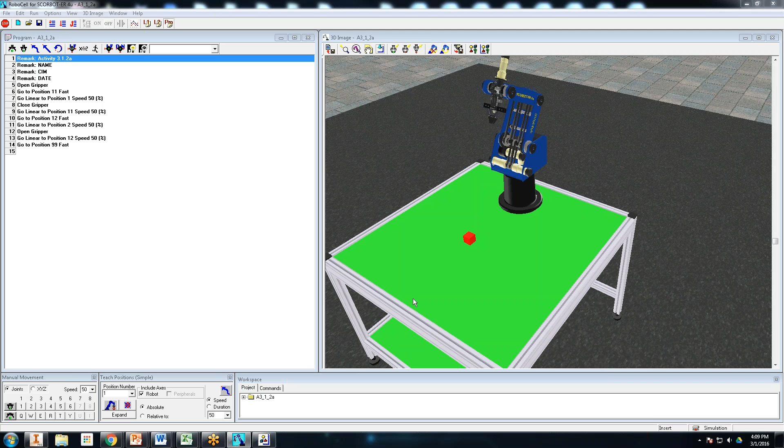Like I said, I was just wondering because you had a problem and it was something you knew about. No, like I said, this is the first time in years that this software has given me any problems. I've had no problems whatsoever with this software.

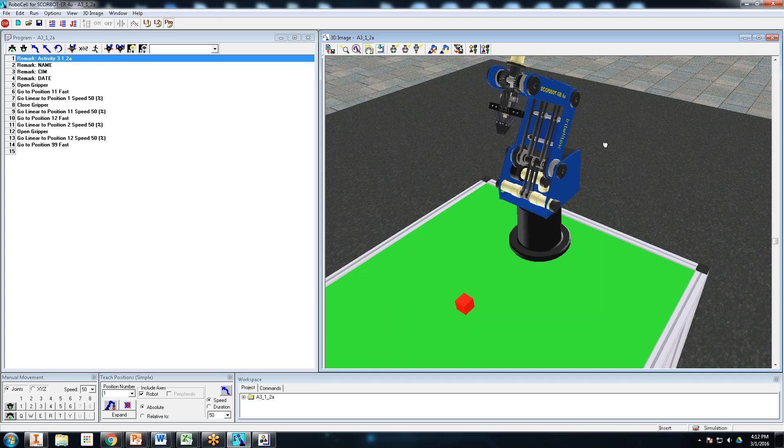Kids have a hard time with this. So when you go to open a program, you don't really open it sometimes - you have to import the 3D model. As Jim's going through this, if you have any questions, the idea is you make the cell, you make the factory you're going to be working in, and then you open it up in Robocell and program it. So with that, go ahead Jim, finish up with the building.

In cell setup, all I have defined is what robot is going to be available for me in my folders. That part can't be undone once the file is created. So once I go to new and say it's an ER4, that part is static - it's going to stay for the specific cell. I can now come into robot, and there's only going to be one there that's my option - whatever one I selected as my default.

When I go ahead and import it, I can either bring it in with a slide base, 1 meter or 1.8 meter, or with no slide base. Your first couple activities, the kids are going to use no slide base. So you just say OK, and when it does that, it'll automatically populate the robot right in the middle of the screen at 0, 0. So it's defined right there in the middle, just kind of floating there.

Each one of these folders holds a whole bunch of different things that you can put in. You can practice with a bunch of them, but for right now all I want is a robot, a table, and some material to play with. So I'll come to General, and I have this nice little table built out of what looks like 80/20, and you get to decide how big it's going to be. For this first couple activities, you can just leave that alone.

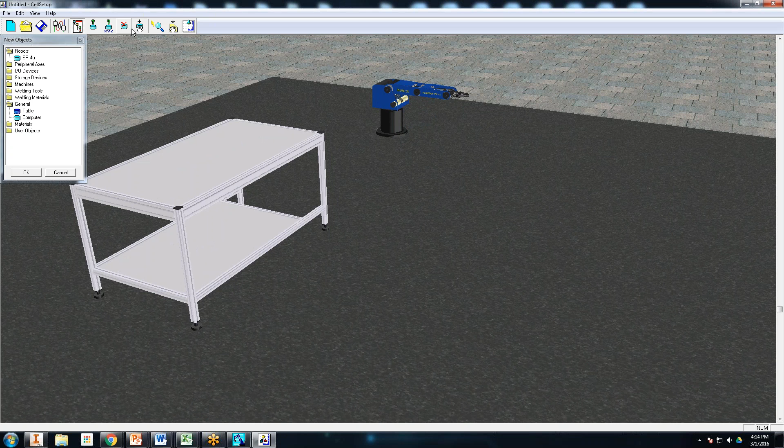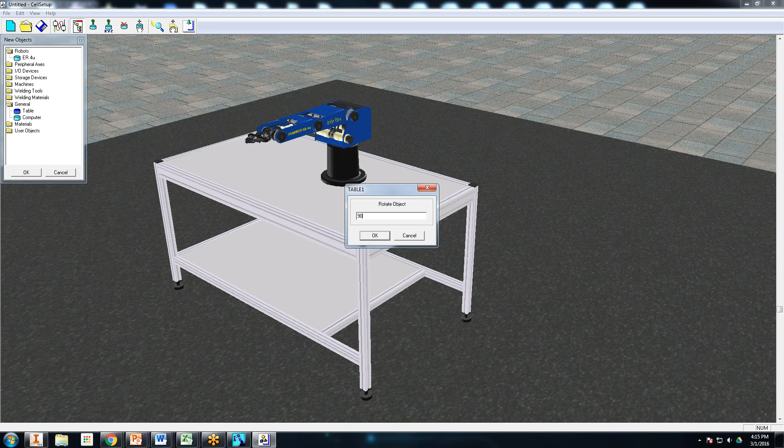Your little icons up here, your little blue cylinders - the first one will just show each thing's name. Your XYZ will show their coordinates. The one with the red X on it will allow me to delete objects. The one with the little hand on it will allow me to grab objects and move them to some location. You can also double-click an object - it'll give me the option to rotate it, and also the option to put it in a specific position, whatever I want.

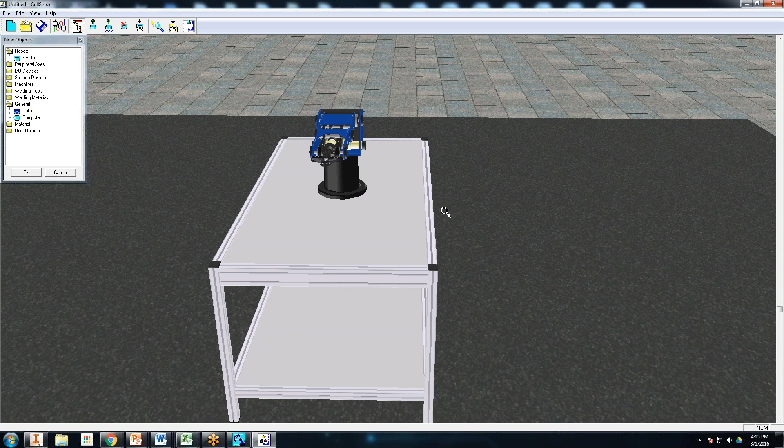One of the things I want the kids to really start to understand, which you have in your PowerPoints, is before getting into this robot and everything, understanding what a robot's work envelope is. So if I double-click the actual robot itself, I've got an option that says show its envelope. Once I do that, it shows me everywhere the robot can reach and can't reach. The bad part is you've got to try and teach the kids it's an illusion - this ring is based off of how the robot currently is. So if you really look at it, he can't actually reach this blue line on the table.

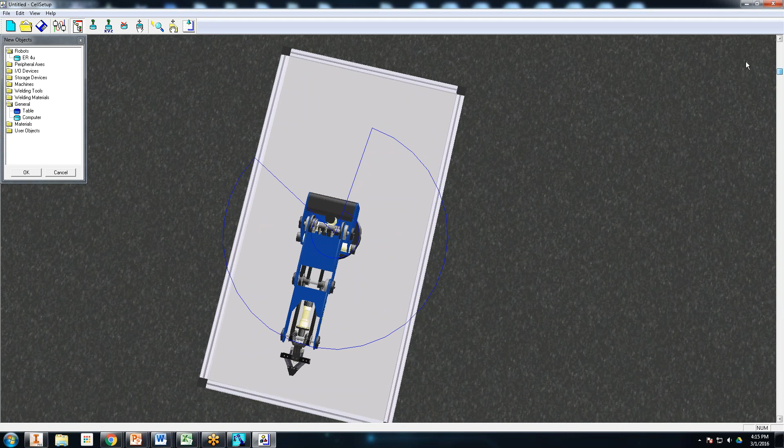It's just an illusion, because its gripper is going to be straight up and down here in a minute, -90 to the table, and if you put something out here at this blue line, it'll say that it's outside of its reach and it can't go get it.

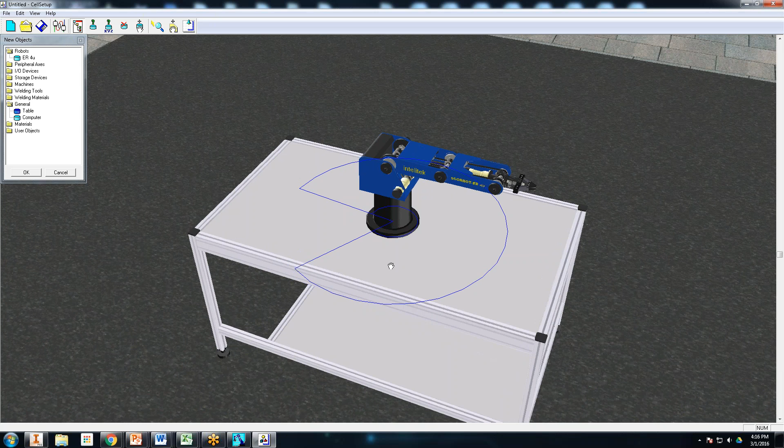It's a good talking point to start getting the kids to think about why we have this Pac-Man shape, and hopefully you can get them to give solutions that have to do with its wiring, its belts, electrical components inside it, and so on. You can see that it actually can reach farther behind it to the right than it can to the left.

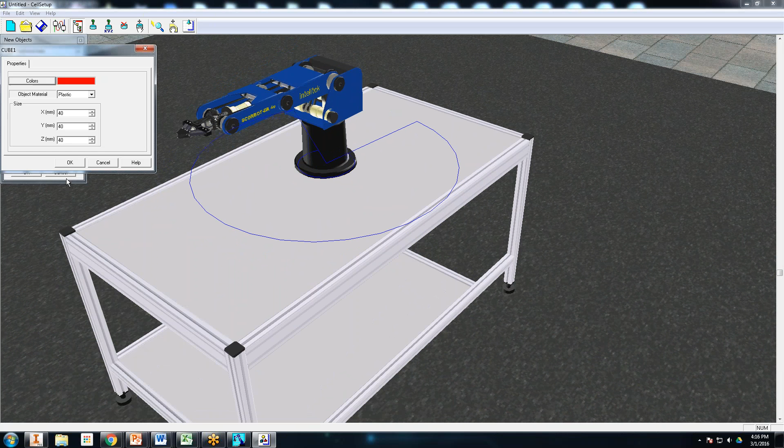All right, so we've got our table, we've got a robot, and now I want some material. I'm just going to grab a cube. Right now it doesn't matter what material it is, doesn't matter what color it is, and we're just going to leave it as the 40-40-40. I'll say OK, and stick it somewhere on the table, then position that somewhere specific.

The bad part, and I still have never really found out why, it's counterintuitive about the X and the Y. If you look at the coordinates as they are right now, and I say this is going to be 0, Y appears to be my side to side, and X appears to be my in and out, which is not the way most students would think. They think you're looking at the robot this way, that this should be your Y in and out from the robot, and X should be your side to side. It's not the way that it works.

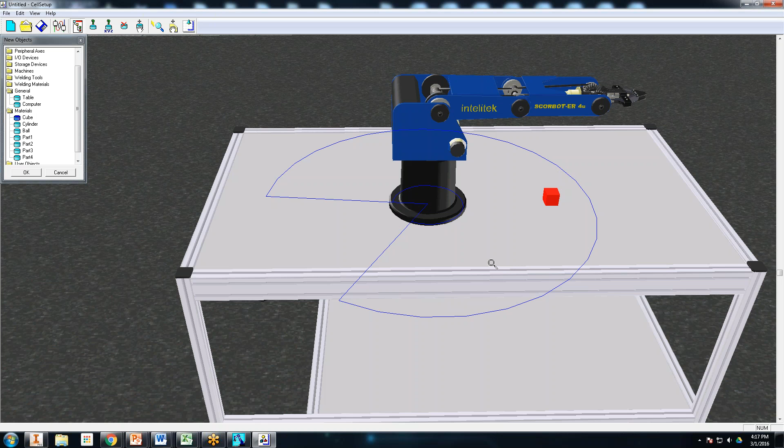It's not the way they have it developed. They actually have it developed this way, where you have your positive X or positive Y over here and your positive X this way, and then your negative Y over here and negative X back into here. Why it's set up this way, I don't know. You could rotate the robot, I've never had the kids do it. Most of them, it's never been a hang-up for them. They just kind of learn eventually that Y is not side to side, Y is in and out, and X is side to side. So it just is kind of what it is.

Yeah, anything on that one, Chris? It's backwards from everything, and we have real robots, and I thought, okay, it's some craptastic software that they just do things backwards in Israel because that's where Intelitek is made, and it's not. It's all Fanuc. All these robots that you talk about, X is Y and Y is X, and I've yet to figure out why. It's just the way it is.

Jim, Chris, I can tell you why. You there? Yep. Yeah, this guy.

Oh, all right. It has to do with how the robot's actually designed around 6 axes. Most industrial robots run 6 sets of resolvers. In order to get those resolvers to talk to each other and go to a home position, because normally they have a tool center point that they use for home positions and test with, if the robot has a stop on it and you don't do it that way, the robot works in reverse. So they don't want it working in reverse. They want you to see it one way and have to do it the other so that it doesn't do that.

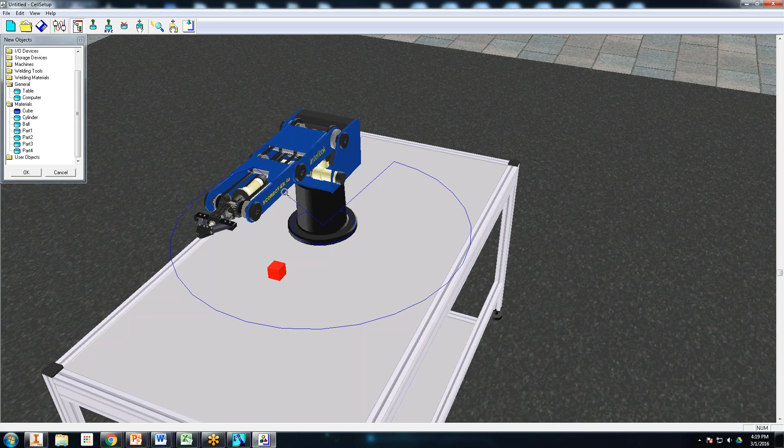visually you're doing that with the teach pendant and those resolvers and the stop, because almost every one of them prevents the 360 turn with a mechanical stop on the back also. So it gets counterintuitive. I will tell you, as somebody that came through the industry, it is very counterintuitive initially. But if you learn it, it actually works pretty well for you. Yeah, kids are flexible.

You just tell them X is Y and Y is X. They complain for about 3.5 minutes, and then they go to town. So yeah, they figure it out easier than we do.

Thanks, Scott. So with the way the software works, one of the big hang-ups with it is it actually creates multiple files. One of the files you're going to create is the 3DC. So one of the things you really want the students to do is get extremely organized with how they build each one of their cells.

So I've just called this PDP cell 1. I'm going to store this in a folder all by itself. You're going to see here in a minute there's going to be multiple icons that populate into the same folder. So we'll go ahead and hit save.

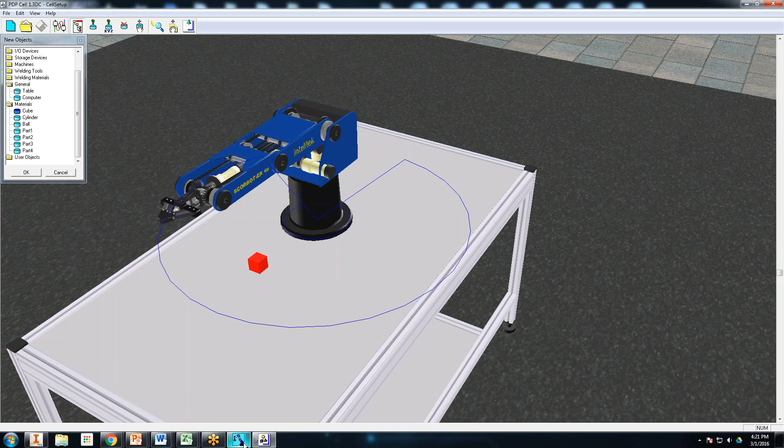Once I've hit save, I'm really done with cell setup, and I can go ahead and completely close out of it, or I can just come over here and start a new program. Like Chris said, this is where you get to play with the robot. This is really my teach pendant simulation component.

So what I'm going to have to do is import my 3D model, which I just threw up on the desktop, and there it is. So go ahead and say open, and now I have this one specific cell.

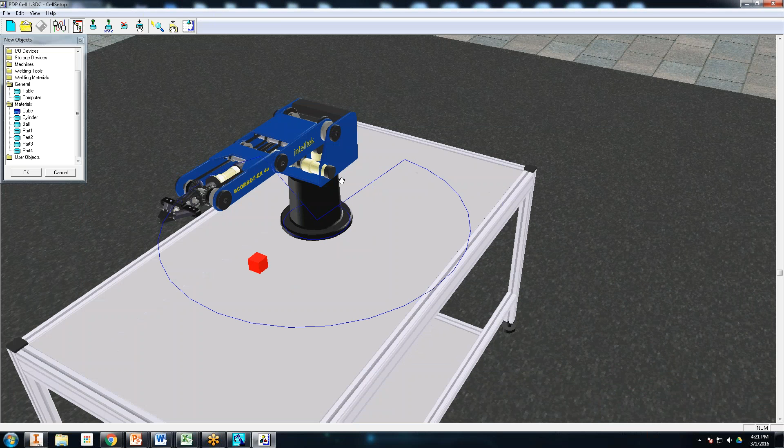I will tell you, however this one is—whatever view it's looking at, those types of things—when it gets saved, let's make something happen and I'll resave it. When I come back into here and reset my cell, it's whatever it was.

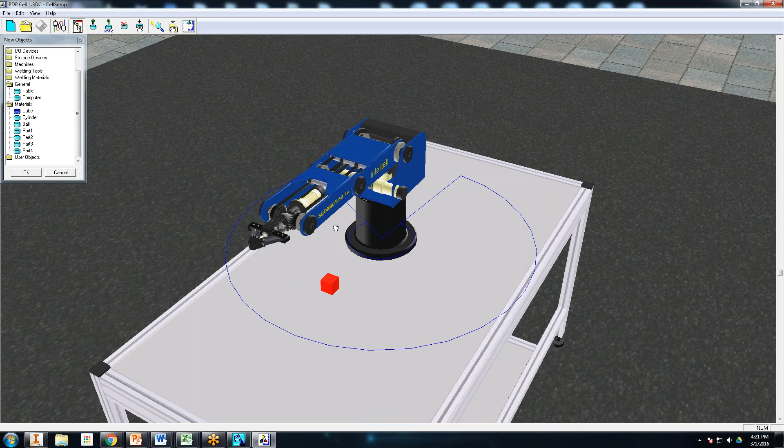So if you don't like the image, you can change it in the cell setup, or manipulate it in here, because you'll get one picture exactly like you want it, or exactly where the gripper is—tilted the way you want. Every time you hit reset, it will keep jumping to somewhere else, and the kids can't figure out why it keeps doing that.

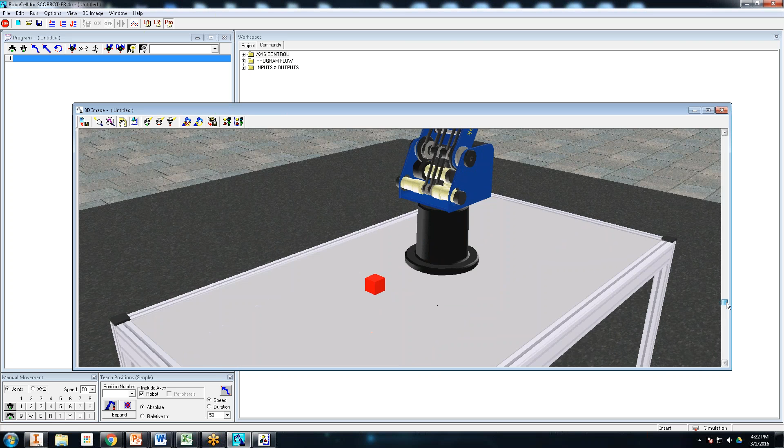Well, it has to do with however you left it in cell setup. Unless I get this one set up exactly the way that I want—tilt, pan, do whatever—and then I have this little camera icon with a floppy disk there. The kids don't know what either one of those icons are, but whatever, it's supposed to be a camera. As soon as I hit that, now whenever I hit reset, it will save whatever picture I currently have.

So that's one of the first things: get the kids to get it kind of like they want and save the camera. So now every time I reset the cell, every time I pick it up and play around with it, whatever, it will keep coming back to here.

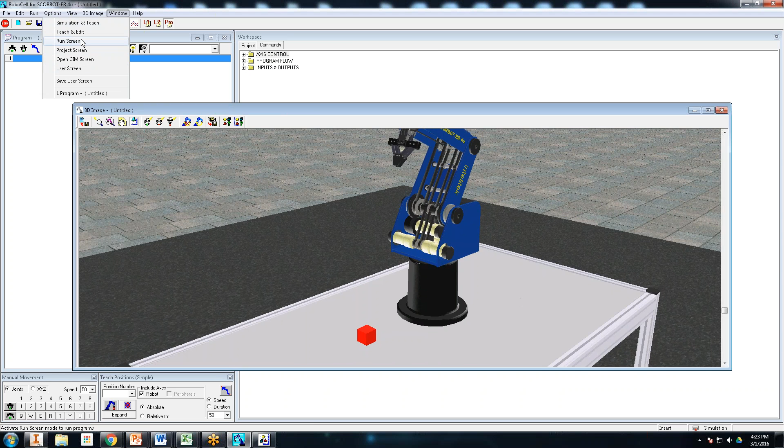The next thing is I'm going to come up to Window, and pick one of these presets that has to do with how it defines these workspace environments. You've got the Run screen, which you lose some of your tools. You've got Teach and Edit, which you lose the 3D. You've got Project screen, and Simulation and Teach, which is what I use majority of the time.

And it'll be the same thing. Once you have it the way you want, you can hit Save User Screen. Now every time I exit this file and come back, it will re-import the 3D model for me. Everything will be just like I see it.

I usually have the kids come in—as soon as they drop in the model, they simulate and teach and then save that one. So it's only for this specific file, but it will save this screen however I have it set up.

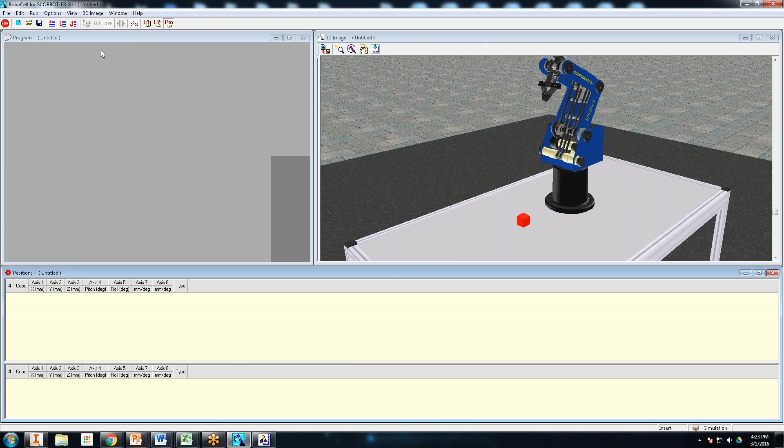So that in a nutshell is just how to get from cell setup into Robocell. You create your new file. Once you have your new, you're going to import the 3D model. You get the camera like you want it, save the camera, and then manipulate what the screen looks like and save that. That's just a habit I have the kids get into—a set of norms I have them do each time when they come into Robocell.

Another window that the kids are going to want a lot, if I go to View, I've got Robot Movement, this little box will pop up, and a lot of students do really well with this box rather than this one. They have a hard time knowing that the base here is joint 1, then we got joint 2, joint 3, 4, 5, 6, 7, and 8.

I don't have that yet right now because I don't have it defined in my cell setup. You also have your XYZ movements, which we're going to do linear movements on the X, the Y, or the Z, where it's moving multiple joints at the same time.

If you really want to teach them advantages and disadvantages of joint movements and XYZ movements, especially because this robot does not have yaw. This robot only has roll and pitch and does not have the capability of shifting from side to side. So a lot of times the Y movements for this robot, side to side movements, it has a hard time trying to stay perpendicular to whatever it is you're asking it to do because it doesn't have that degree of freedom.

First thing I want to do is there's a whole set of projects. So if we look at the projects that we've got, there's a whole slew of them, and we're just going to kind of touch on a little bit of them today. So I'll go into Introduction to Robotics and Automation.

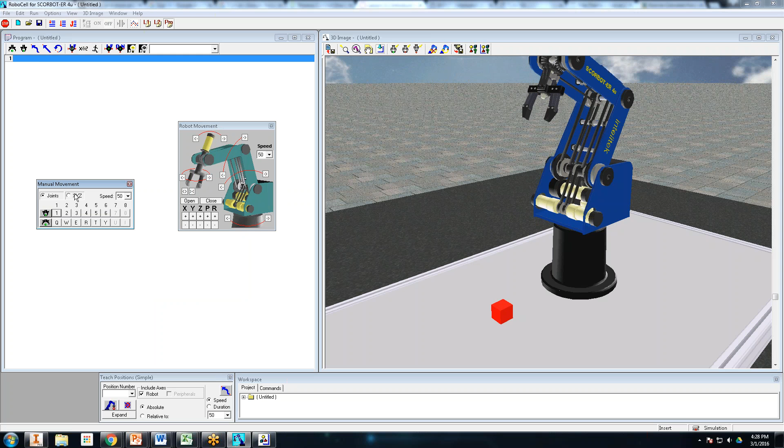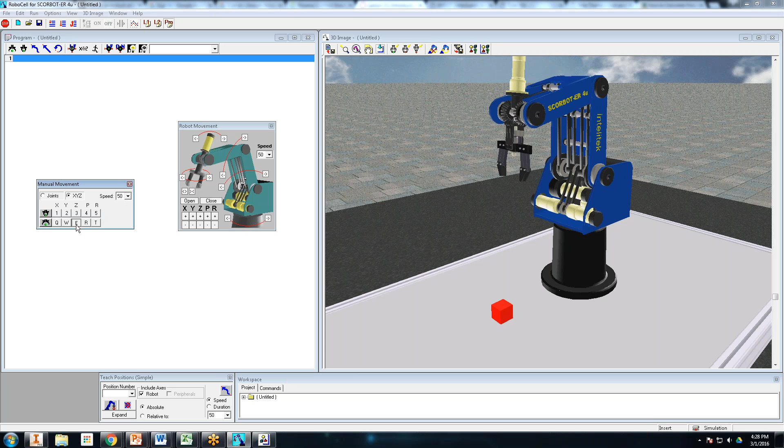They can do it again as XYZs and joints. You just want to kind of get them to start practicing a little bit, trying to figure out what does what. So if I move that and I move this one here, and then I can tilt that there. And if I come over here to XYZ, I can drop straight down on the Z. I can change my speeds. These are percentages, so this is 100% of how fast the robot moves.

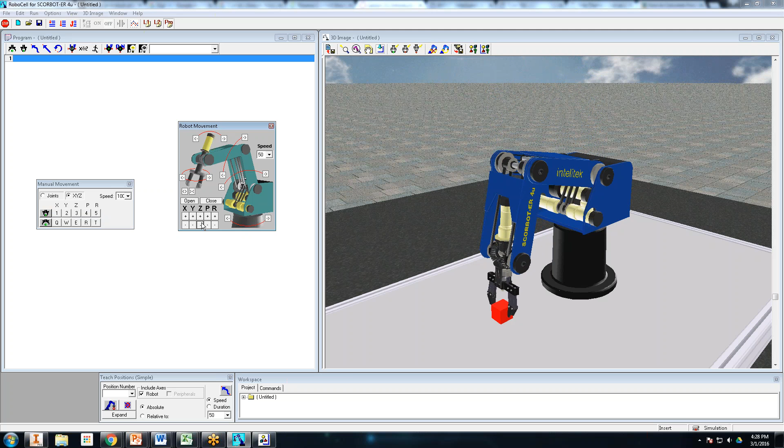And in one way or another, I want to get myself to a place where I'm ready to pick up my block. Majority of the time, I actually have the students work backwards. I have them go down to the table first, wherever it is they want to pick it up, and that becomes their position. Recording the ones above it is fairly easy. So getting this one exactly where I want, that's the one I spend a little bit of time with, whether I'm adjusting my pitch, whether I'm adjusting my roll, and you have to go through and teach them what pitch and roll and yaw are. They don't know those.

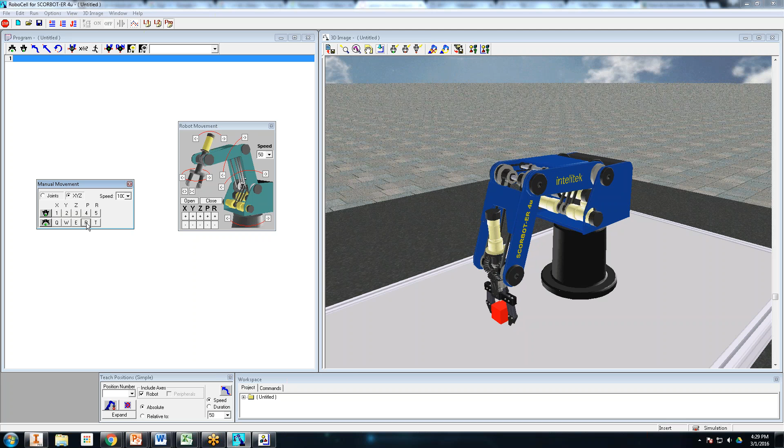So I figure out that that's going to be a good position. I look at it, I'm centered on the block, and I go ahead and bring up my little record box. I'm going to say that this right now is going to be position 1. And I will hit this little blue robot, which will record it. Now that position's recorded, that's something I can physically utilize in my program.

And notice, so I will close the gripper. You want to be really clear with the kids too: right now you're not writing a program. They think they're programming right now when they start out, but they're not programming yet, they're just moving. It's playtime. They're playing around with the robot in the simulator.

So the idea is that you build your cell, you bring it into Robocell, you teach all the positions, and once you've taught all the positions or recorded all the positions, you can then go write your program. So there's the next step in the logical order.

So now what I'm going to do is just pull the robot up in the air about the height of a block. That's good enough, and I will call that position 10, and I will record that. Now all I ask them to do is bring another position over here and then another one over here, so they just have some multiple places that they're dropping it off.

It's going to get grinded over here or something. The robot will go back to its home position and come back and get it and take it over to get painted, whatever. So they're learning how to manipulate the robot, learning how to move it around, learning what each one of these joints and everything do.

In the activity, it just asks them to pick it up, bring it back, put it right back down. And I have found in the past that does not provide them enough practice to be good at it to do the rest of them.

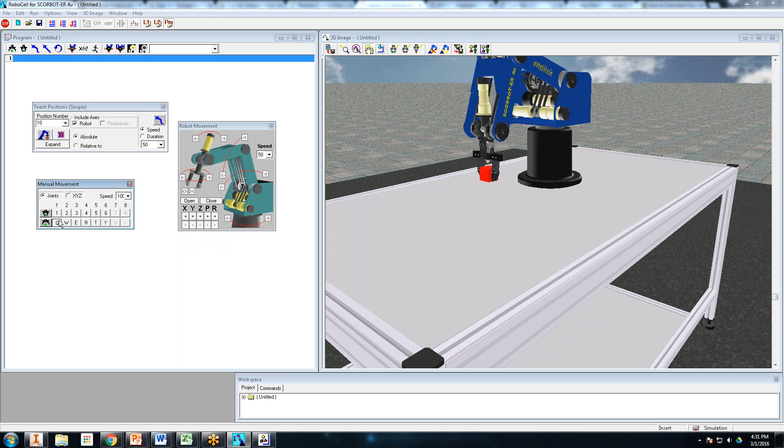So I'm just going to kind of rotate on my base. I'll say I'm going to have a position over here, and that will be my position 20, and I'm going to record that. And then down, if this was real life, I'd be laying on the floor, right underneath the table, trying to eyeball it to see if this is going to go exactly where I want, because right now I'm not going to be teaching positions, I'm just manipulating it.

So it's really nice in the software where you can just drive it down until it hits the table. Once I hit the table, that's my position, I can record that as 2. You see, I haven't actually let go of the cube yet. It all has to do with actually being able to get it and some of the problems I'll run into later on. But right now I'm just kind of manipulating it.

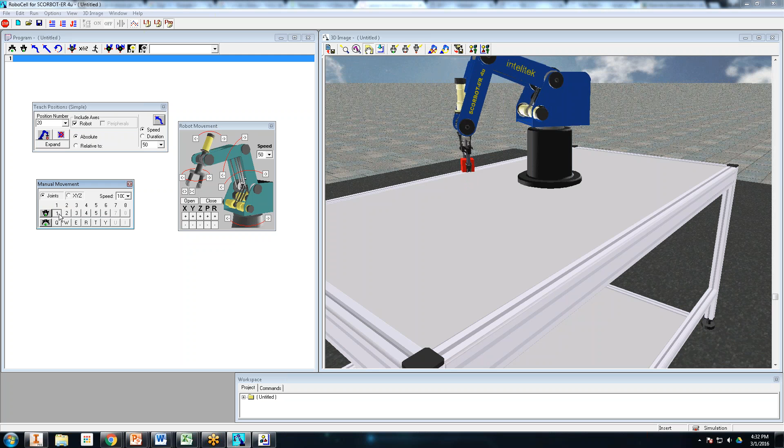And let's go back to 20. This little icon right here will allow me to jump to positions, so I'll do that. So it goes back to 20, and then I'm just going to do one more movement. And we'll bring it over here somewhere. That'll be my 30. And then run it back into the table again.

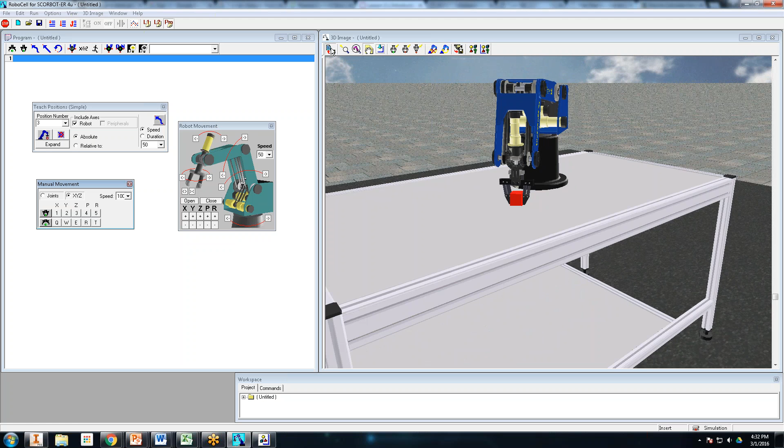So I have positions, I've got my pickup positions, I've got some drop-off positions and so on. The thing I don't have right now is a home, a comfortable position for the robot to sit at in between each one of these operations. Majority of the time, you just have the kids hit reset, and that is going to be its home position.

What you can't see is in real life there's actually some rubber bumpers back here. This is supposed to be the most centered or most comfortable position the robot can sit in. It takes all the stress and strain off of its motors. These aren't servo motors, so it really isn't that big a deal, but for the most part this is supposed to be its natural position.

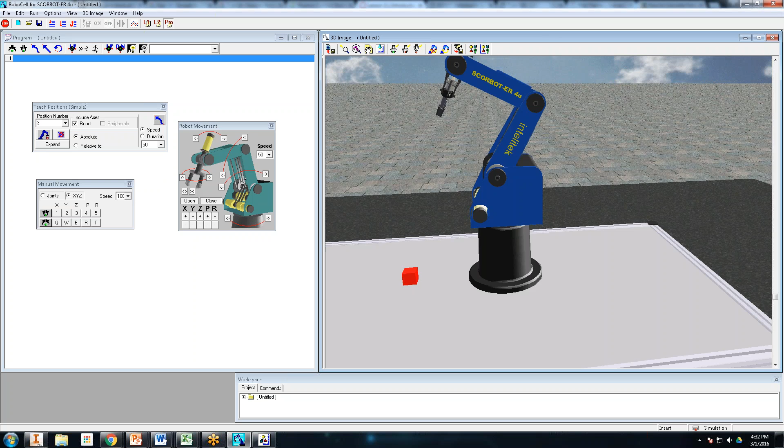So I'll call that my 99, and that's just typically what we call our home. So if I look right now, I have a 99. The 1 was at the table, 10 is in the air, 2 is at the table, 20 is in the air, 3 is at the table, 30 is in the air. You can really do whatever rhyme or reason for your programming that kind of makes sense to you.

This is really back a long time ago when I used to do handwriting code. It has to do with being able to insert numbers. If I need an extra position somewhere in here, I've got a couple other positions, 11, 12, 13, 14, 15, 16, and so on.

So I'm going to now go ahead and start running my program.

So I don't need you anymore, I don't need you anymore, and I don't need you anymore. But I do need you in my life.

So over here, this is where I'm going to start writing my program. This is where my icons are to write. Eventually, this is what you're going to use, and you'll see that you have a ton of commands that in one way or another can be used.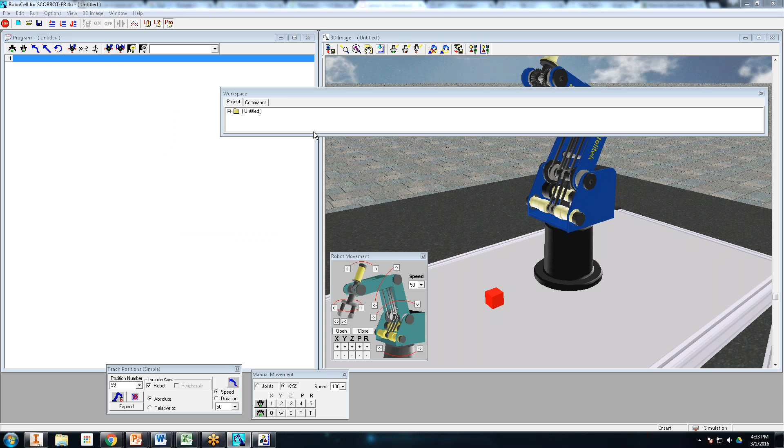But for these first activities, I don't even show those to the kids. Show them though too, that make sure you're not in level 1 or level 2. If you want all of the tools, you have to be in the pro level.

Kids will open up, we call it loser level 1 or loser level 2, or pro. And if you're in level 1 or level 2, the tools that you have available to you aren't as many as if you're in pro mode. So if you're missing tools, make sure you're in pro mode and all your tools will be there.

Other big thing is if the robot comes in and looks like this, where the robot is straight out, it's in online mode. It's actually trying to communicate with the controller box. So if your robot looks like this, it's not going to do it, but if it looks straight up and straight out like it did back in Cell Setup, a lot of kids for some reason those will come in that way.

It's just because they're not in simulation. Once they go ahead and hop over to simulation, then he'll look just fine. He'll look like this, and they can manipulate him. Otherwise, they can't move him, they can't do anything. So again, if he looks like this when they bring it in, it's in online instead of simulation, or offline.

Is that what it is? No, I think it's online. But I think, yeah, no. I don't have that problem all the time. I had it once this year. The majority of them come in just fine. Why that kind of stuff happens, whatever.

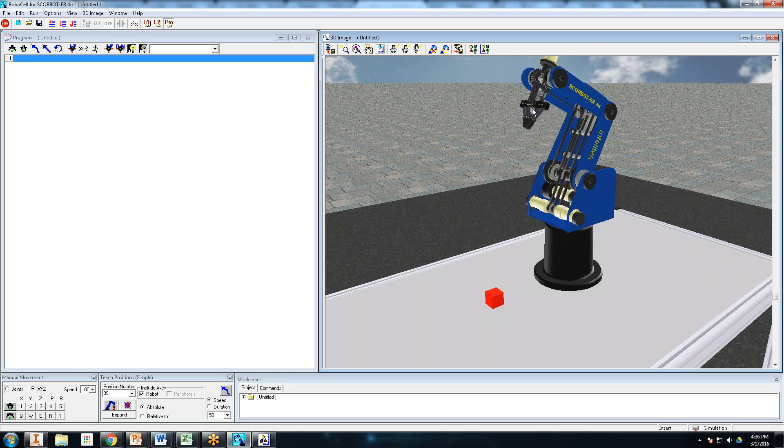And these little black robots are really bad at it. To get any kind of accuracy, they need to have above positions that they can go to fast, and then slowly and accurately go straight down to where it is to pick these things up. Otherwise, they'll have no accuracy at all. So not only are you trying to teach them real-life strategy for the big robots, real-world robots, but it's mostly for these little tiny ones that they're going to use.

They're awful. You'll ask them to stop somewhere, and you'll be going really fast, and they'll bypass it, and then the servo will back up and try to get it to where it was. But by that point, the kids already have their gripper closed, and they're trying to move somewhere else, and it's just a headache.

Keep in mind, too, that in industry, when you're picking stuff up, they make robots to be very, very accurate. In order for them to be very, very accurate, you can't drag things across tables. You cause friction, and with friction, you build in inaccuracy. So hence, when programming for industry, you're always going to above positions and coming down, just straight down when you're doing pick and place operations. It's just the way it's done.

So every time you program a position on the table, always program a position above it. You'll be all set.

So again, I don't show the kids this folder yet. All of these double letters are hot icons or hot keys that will make these things come up. The one that I want to show today is RE. RE will bring the remark tool up, just like it was in CNC Motion.

I'm going to do commenting. So if I just hit R and E on the keyboard, I can go ahead and say that this is my manual pick and place.

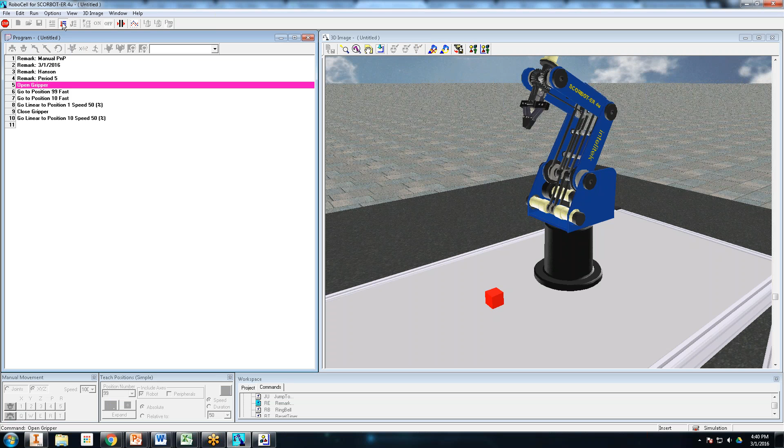Okay, so let's run what we've got so far. I come up here, I can run one line at a time, I can run a full cycle, or I can loop it, which right now I wouldn't be able to do because that would just drop the cube. So I'll run it. So 99 fast, goes to position 10 fast, slow to 1, close the gripper, slow to 10, and then I can just keep writing the program from there.

So I can say I want you to go to 20 fast, 2 slow, open the gripper, 2 slow, and then back to 99 fast. And so I will reset the cell, and we'll see what we've got.

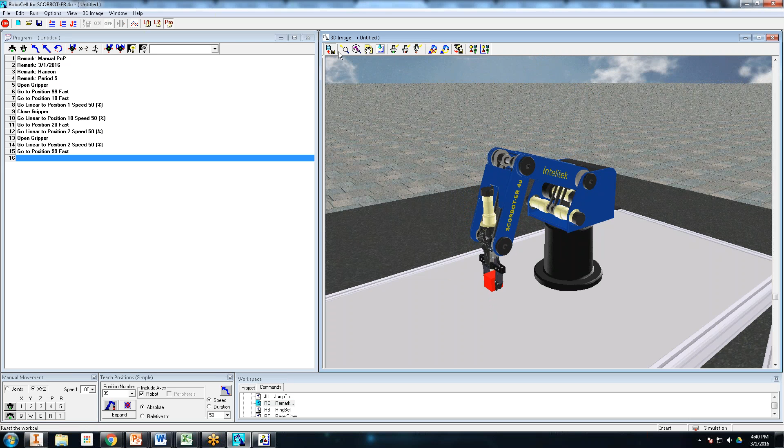So for the most part, the kids kind of get used to the robot fairly fast. And the bad part will be later on when they've got lots of positions. Getting all those positions just sometimes takes a little bit of time. So we should open it up, and then you should go back to 99 fast.

So that's an error right there. I did that on purpose. We'll say I did that on purpose because I forgot to go straight back up in the air. I just said go to 2, 50%. I said open gripper, then I said go back to 2 fast, or go to 2 again.

So you can edit them. Just double click on them. You can edit them. If I had forgot that line of code completely, as long as I'm clicked on the line after it, I can then say insert it. It will insert lines of code. It will do all that for me.

So now, even without this, I can go ahead and continue writing the program. So I can go back to 20 fast, go straight down to 2 slow, close the gripper, go straight back up to 20 slow, go over to 30 fast, straight back down to 3, open gripper, straight back up to 30, back to 99, and it's really helpful.

There's a piece of paper that you can print that's in the curriculum to try to help the kids out, but knowing all these positions and where things are, it's really helpful for them to draw it out. Draw them a fancy little picture or something that has what it is and where all their positions and stuff are. Otherwise, right now I only have 6 positions. Once they start getting more than that, it's going to start becoming really hard to keep track of all their different positions. And I can do whatever I want with him from there.

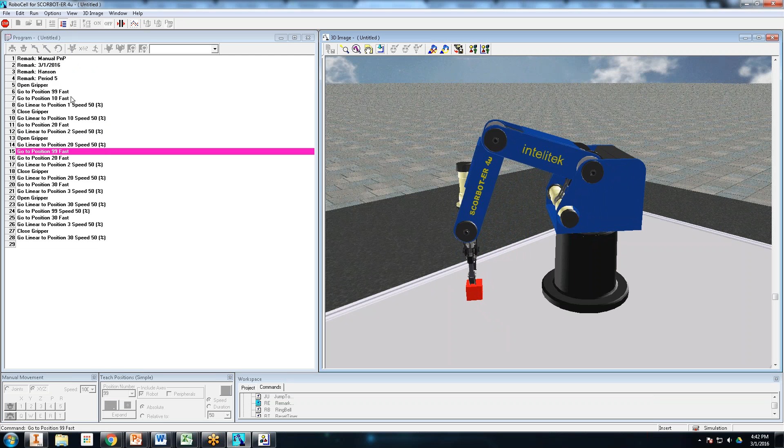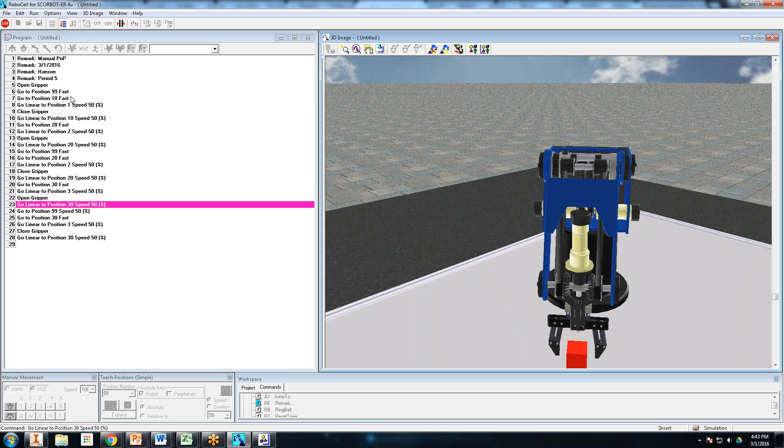As you go through the activities, they're step by step, A through F, lockstep. An 8th grader can sit down with that activity and complete it if they follow the directions. Jim's showing you this is what you can do, this is how you do it, step by step. So you're looking at it thinking, wow, he's moving pretty fast. How did he do that? How does this work?

This activity is basically 3 times harder than the first one they have you do, activity A. So it's all in there. After they get through A, B, and C, they work on their own with these, figure them out, and blow right through them. They're going to surprise you, I think, and they'll teach you guys something along the way as well.

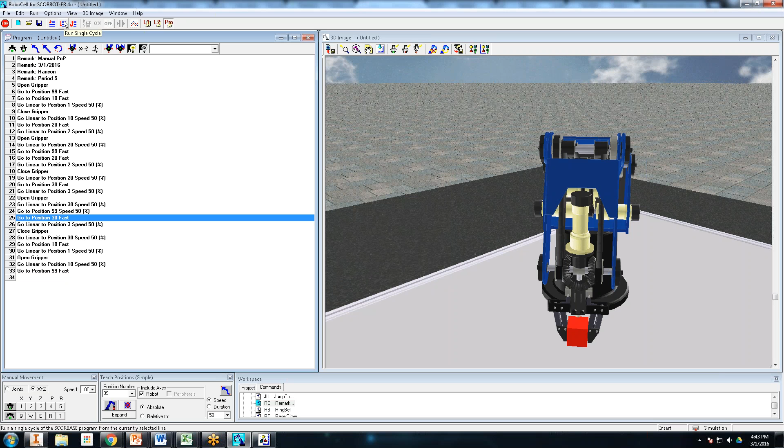Wherever you have the program highlighted, when you come up here to run the program, that's where it will run from. So if you're trying to run it from the beginning, your kids will need it from the beginning. I make it a habit of having them break their program up with comments. So this first one can be my initial position, up here I could have an RE home robots, and down here it can be pick up from stock, whatever it is.

If you look at their example codes, I don't necessarily have them do it, but the people that write the software do something kind of like this so it jumps out at you and shows you where these things are going to be. They don't typically do it for their first lines of code, but they'll do it for the rest just so it sits off to the side a little bit. Sometimes they'll even put one in that has absolutely nothing in it, just those types of things, so you can start dividing the program.

Otherwise, there's no way to put spaces in there. It's just being able to do this kind of thing. So you've got drop off 1, drop off 2, put back into storage, whatever it is.

Like I said, the very first activity in the curriculum just asks them to pick it up, bring it back, put it back down, go back to home, and that's it. I go through this really quick to get the kids unafraid of the robot, so they can see that making movements and writing the program can be fairly fast, and then I just unleash them. Really, I only do about 10 minutes, and at the end of 10 minutes, I unleash them.

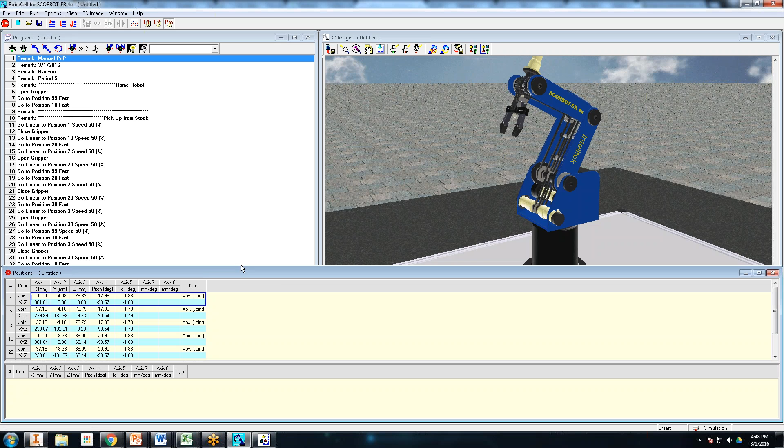Show them the Pez dispenser, Jim. Okay, so how I have my kids turn it in, they will turn this into me. They will give me this, and it shows me right now that these are all just manually done because they're all wonky. I don't have any positions there that are anything that's exact. So none of these positions were taught.

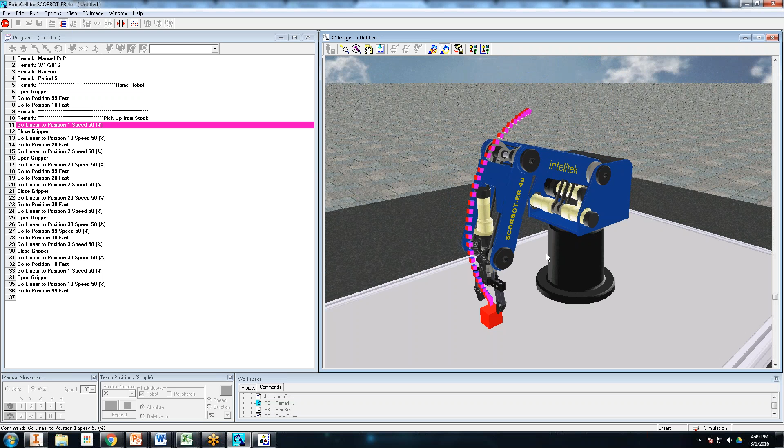And then I'll show you the little chiclets that he drops off. So I'm going to have this robot show and leave paths of what it is that it's doing. I'll reset my cell, and this time I've got this little blue robot. It's called Show Paths. And when I have that on and run the program, I'll actually leave these little chiclets behind him, and they can get me a screen capture of this that will show me this was a go linear. I can see that on their screen.

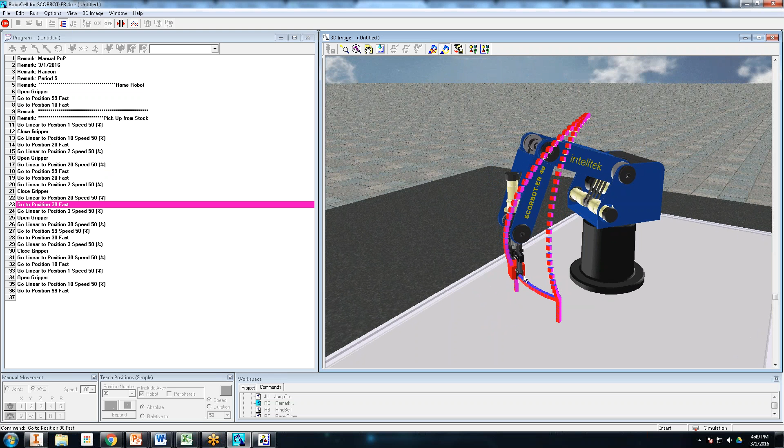That's perfectly straight up and down. I can see that one that has a little arc to it, that's my go-to position. The problem is, I don't think I'm going to use enough of them, he'll actually run out. I don't know if he only has 180 of them or whatever he has, but one way or another he has only so many chiclets, and then he'll erase them all and start over again.

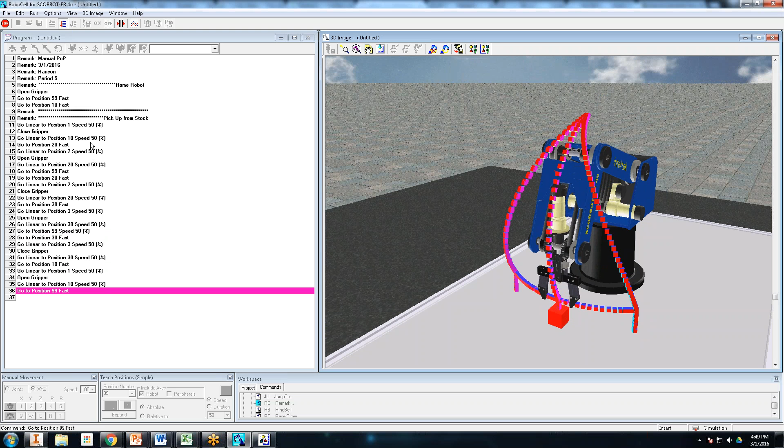So some paths that are just reproducing the exact same path, I'll have the kids turn it off, because right now I can turn off the paths, not going to drop any more of them, and all he's doing is repeating something that already exists. So they'll show me this. I can see their linears. The only thing I can't see is speeds, but I can see that in their program. I can see all their fasts. I can see all their go 50%. I can see all that in the program. So they would get this in a good view and send me a screen capture of that.

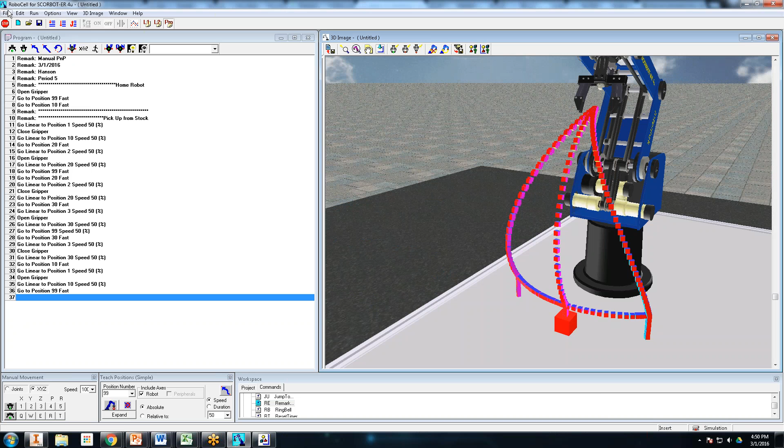We'll go through this next one. This one should actually go really fast because I'm going to teach. So I need to know where my block is. My block right now is sitting at 300, 0. So that's a position that I want to know. So I'll save this project.

Nice part is I can save a whole new project, and I can reuse that same cell that I've already developed. So I can use that cell as many times as I want. All right, so I'll go to my window, Simulation & Teach.

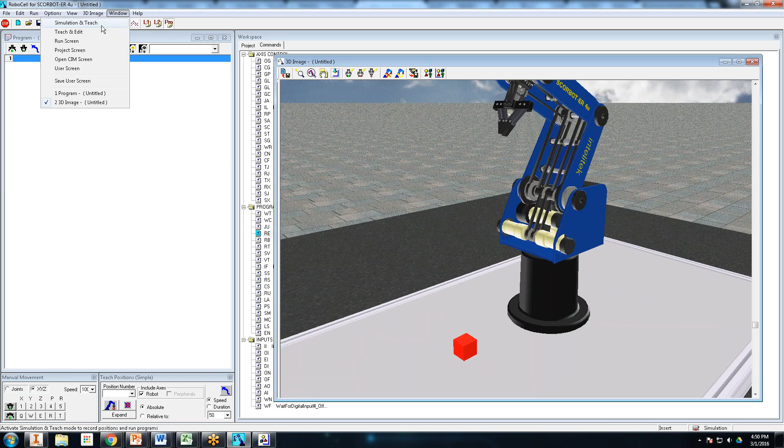Save my user screen. All right, so now instead of the whole headache of manually moving around, I'm going to expand this box, and now I can physically teach it. I wish when you expanded it that these icons kind of went away, because kids will write things up in this box, and then they'll hit this record position. All the record does is look at each one of the encoders and grabs a snapshot of whatever has happened to the encoders from the last time that it was recorded and puts those numbers in. Teach physically grabs specific positions.

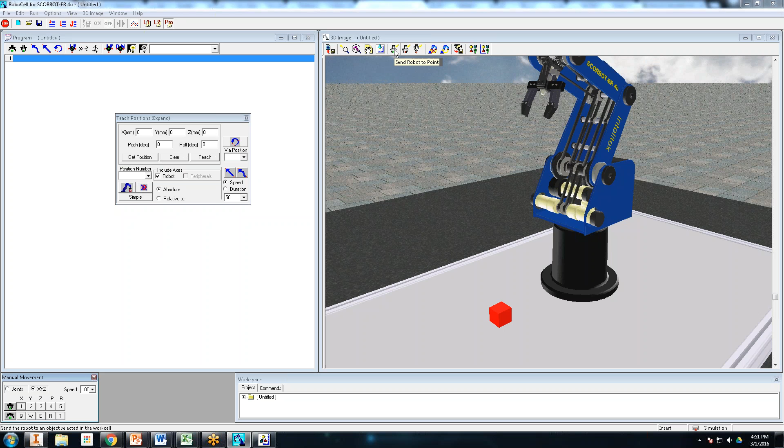The other thing you have is this little go-to object. So this little green one here, I can send the robot specifically to an object that I can record as a position. Kids are like, wow, I wish it was that easy in real life. Some of the robots are. Some of them have vision systems and whatnot on them, so they can do a lot of this now in real life. But regardless, there's my one. I can record that. And then I can say get position. So if I've got 1 typed in here and I say get position, it'll tell me what 1 is. Okay, so it was 300, it was 10 up in the air, it's a negative 90.

So now I could say, what if I left X alone and went up in the air? The block is 40 tall, so let's say 50 in the air, position 10, and I can teach that. Let's see what it does. I'm going to close my gripper and say go to position 10.

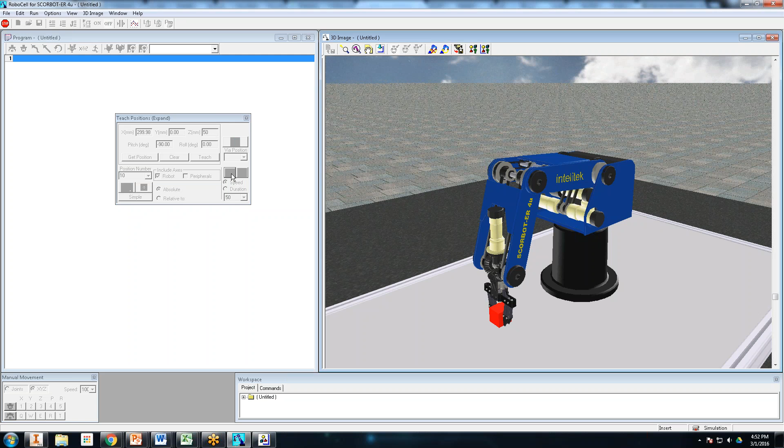If I don't like that, and I want 60 up in the air, I can teach right over the top of it and test it again.

So now what I'd like is for it to go straight back and then straight down again. So straight back, how about this time to 200? That's going to be my position 20 - not record, teach - and then position 2 is going to be back to that 10 again. Let's see what 20 looks like.

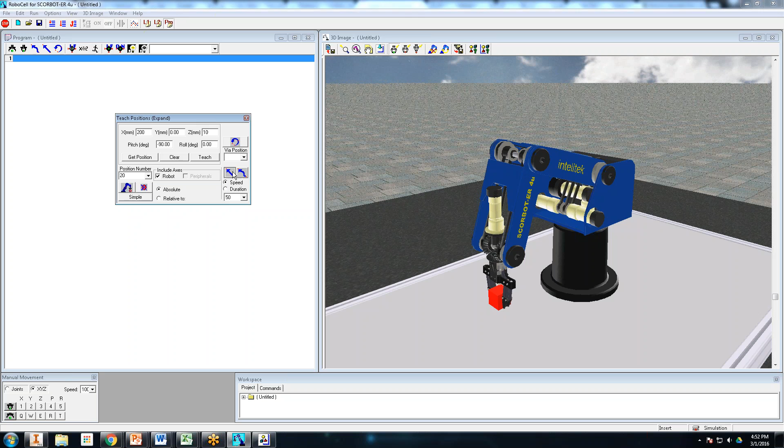Go there. That's good. Let's see what 2 looks like. Go there. And that's all the second program asks them to do.

So it asks them to physically teach the positions instead of record the positions. And then it really is no different.

So I can just come in here, say open gripper, go to - I don't have a 99 yet. Reset.

So 99 record. Go to 99 fast, then go to 10 fast, then go to linear 1 slow, close gripper, go back up to 10 slow, go comfortably to 20 fast, go down to 2 slow, open the gripper, go back up to 20 slow, go back to 99 fast.

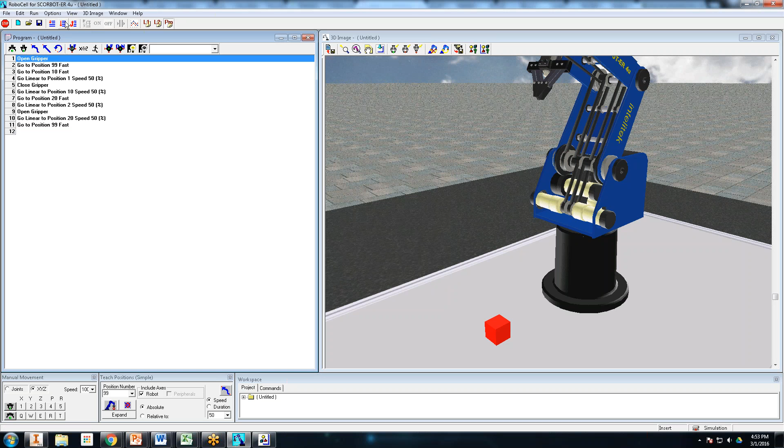So this is what the second program just asked them to do. It asked them to go down here, pick up the cube, bring it straight back to them, and put it right back down again.

So I can see they're not just random positions like they were before. Teaching just gives you the ability to give it specific coordinates to tell it to go there.

But with the 5 minutes I have left, I want to help you out with relative. Whoever wrote the original relative program, it's really kind of a pain in the butt. It's harder than I really want most of my kids to ever write programming. They're doing relative to currents and all these kinds of things, and when my students get done with that, they're like, wow, I hate relative.

It's really helpful if you use it for the right things, like position 1 compared to position 10, position 2 compared to position 20. Those should always be relatives - those are positions I can be in specific places. So if I say...

Expand position... get position, no, position 20. So position 20, I'm going to make this a 0, this a 0, and this a 50. I can say position 20 is relative to position 2. And if I teach that, no matter what happens to position 2, position 20 will be directly above it, 50 in the air.

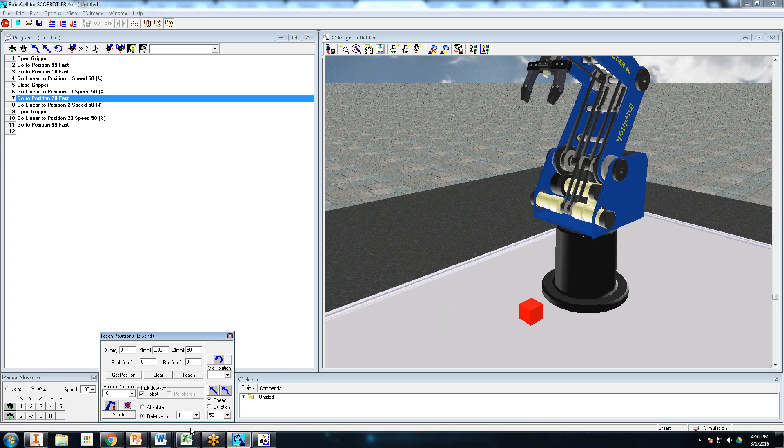...and they'll try to make it go -90 compared to how it was, and then it's going to try to wrap over itself, and it says that's not possible. So you have to say zeros for everything that you don't want it to move on.

So really all I've done was try to simplify the program and make my above positions relative to the positions below it. And if I ever want to go back up and 50 is not enough...

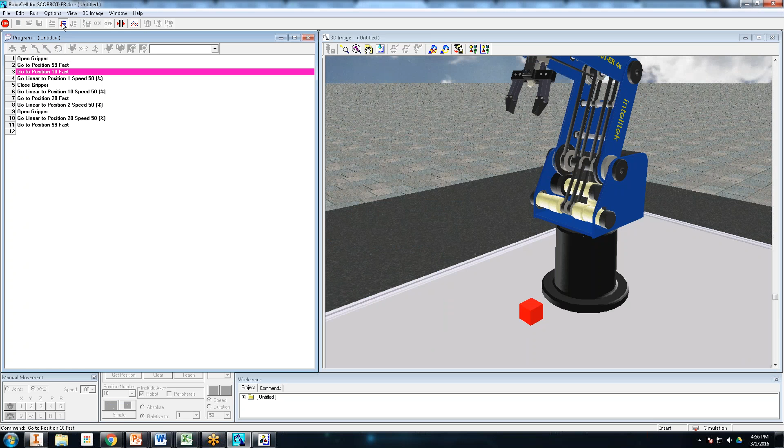...then I can come back in, position 10, 60, teach, position 20, get, 60, teach - and it has re-gotten those positions, and now there's 60 up in the air compared to the 10, so now they're up 70 in the air.

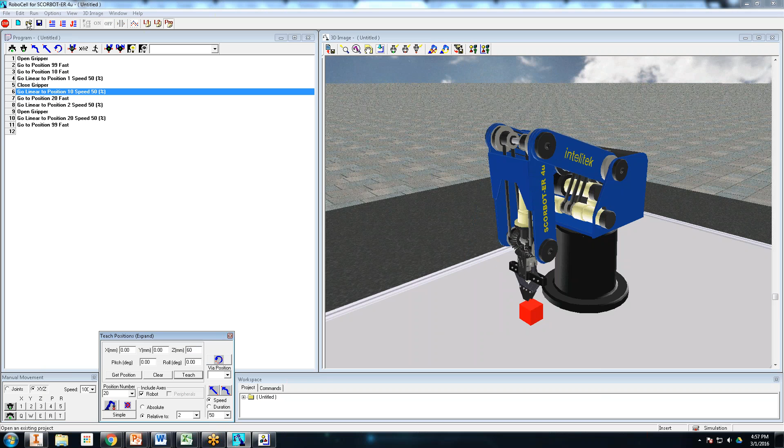So don't be hung up on the one activity that they've got. I can show you real quick - this is what theirs looks like for the relative. It's a really neat project. That's not relative.

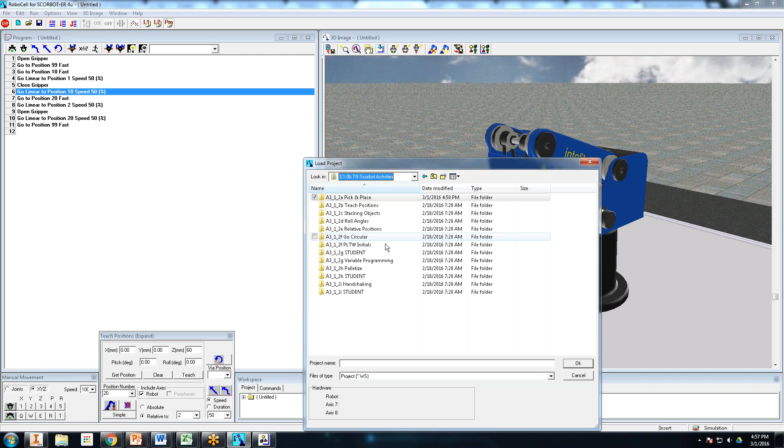This doesn't have the dip tanks. It's supposed to have 3 little boxes in front of it that grab the cylinder, dip it, wait, dip it again, wait, and then put the cylinder back. So it becomes cumbersome. Just don't let the kids get stuck on how much they hate this project. This is weird, it doesn't have the dip tanks. It says it, but it doesn't have them.

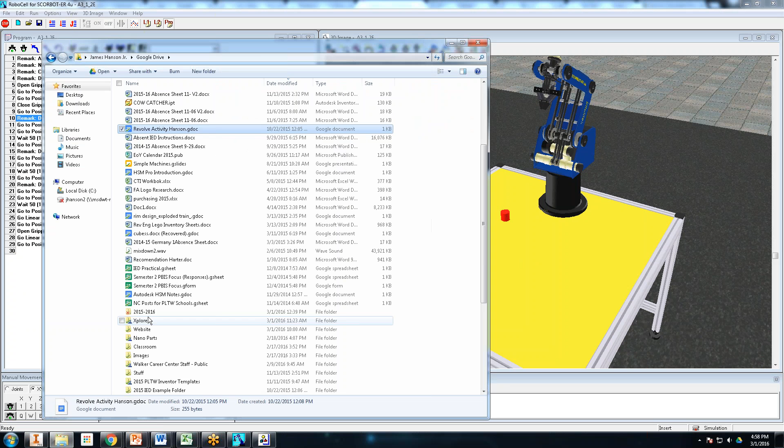That's weird, this is the one that's in the curriculum. I bet the person who did the one in the curriculum didn't put the tanks into the cell, so it's just missing the tanks. So it looks like this.

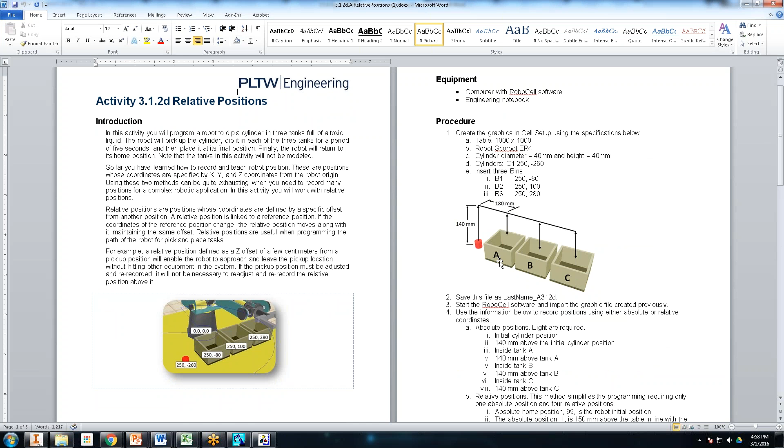So they're supposed to pick it up, bring it over, bring it back down. You have to think about the floor thickness of each one of these boxes. As long as they follow it step by step and do exactly what it says, it works really well. But if they just look at the pictures and think they know how to do it, it goes really bad.

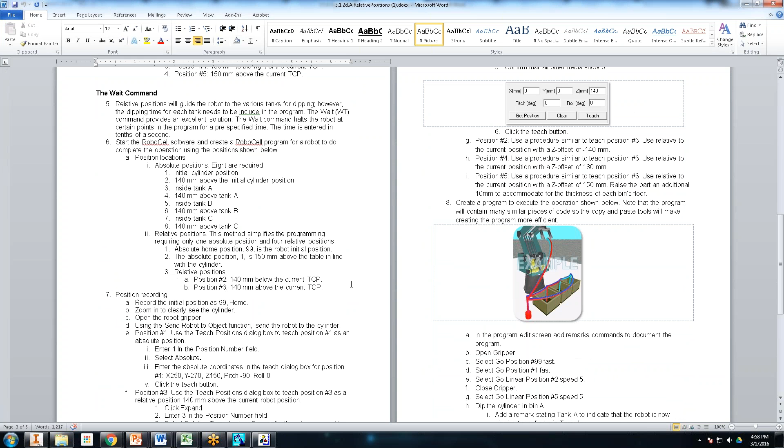The thing that makes this so difficult if you don't read the directions is that they make everything relative to the original position on the table, so you can move anything you want. If you move that one position, all you have to do is record one position and everything changes with it. So it's kind of cumbersome and really overwhelming for a first project.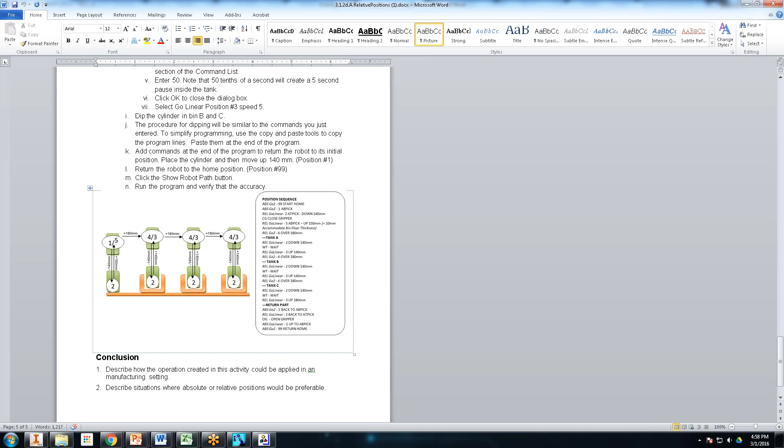But like Jim said, everything's there as long as you follow the directions. I like Jim's way of doing it too, adding relative beforehand. I bet if you did a simple project like that first, it would make this project a lot easier because they would understand the concept.

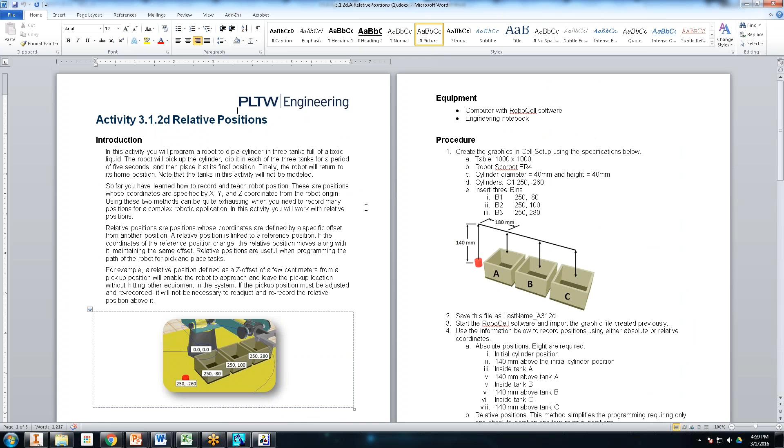So this really becomes my 4th project. My first one is just the manual, my second one is the teach, my third one is kind of a hodgepodge of manual and teach with some relatives, just up and down. Then I hand them this and say, okay, good luck, and if you need me I'll be back here having a sandwich, and they go do all this.

In reality, while my kids are doing all of this, this is when I'm CNC machining my containers. Once they go on to the tutorials, they're pretty much on their own and self-guided after that. Then we can just go out and start running containers.